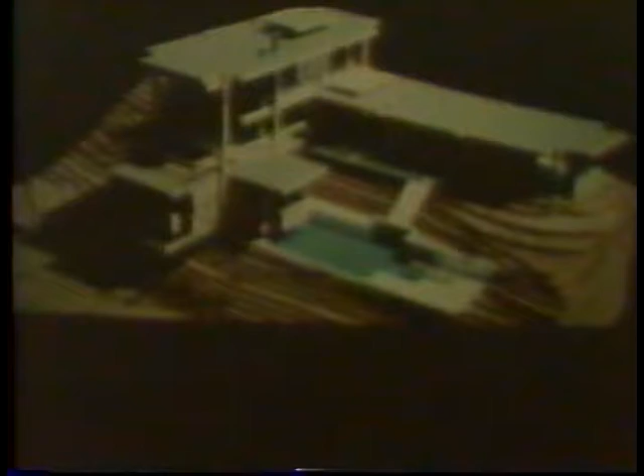And the use of obscure glass - we used a glass called Factrolite, and I used to like it a lot because the tree shadows were very nice against this particular glass, and they had a very wonderful quality about them.

And then I dropped back quite a few years and started up again with garden apartments. I did quite a few garden apartments through this period, and the process there was slightly different but somewhat similar to what I was doing in houses. I was trying to take very small units.

These were in the 500-600 square foot range, and very simply by adding one wall that would slide, as you see there, that would close off the kitchen and the bath to some degree, and a wardrobe that could move around in the space, one would have the opportunity to make a one-bedroom apartment or a smaller bedroom or a smaller living room, whichever one wanted. This gave, I thought, the opportunity for young couples to have a certain amount of flexibility in a very easy and simple way.

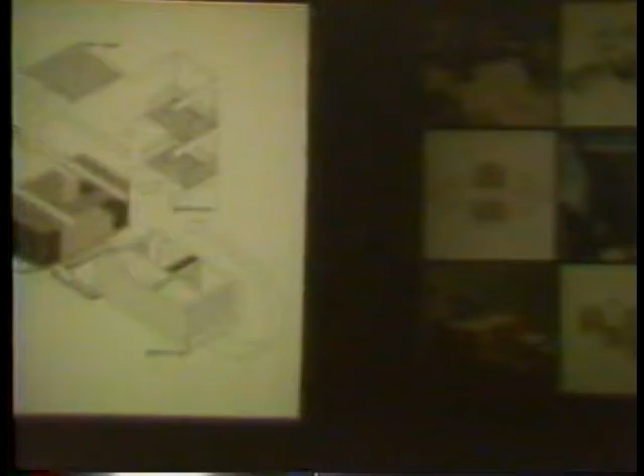But what I began to do was care about a system that I felt could be built on site or in the factory, and would be able to be controlled a little bit better, could be multiplied, and would have potential for use in low-income housing possibly.

I began to work with this idea of the core, taking the core, which could be craned into place, beamed between, and then living and bedroom units slipped in, independent of the other part of the structure, with pieces like the balcony unit then tacked on. It was supposed to work for this apartment next door, but that project didn't go ahead.

Later we had an opportunity, as you see on this slide up here, to do some student housing, and once again I tried to incorporate that idea of a series of these core units that could be placed together. The dark indicates the living, and the light, the bedroom units that could be tied in.

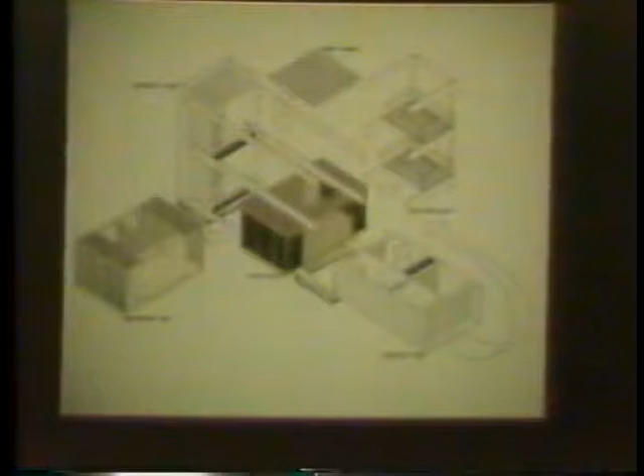And these were some potentials that could be developed to work out to be apartment units like you see there, student housing units. And then when that project didn't go ahead, we actually designed it in this modular fashion. We designed it also as a panel system, and we also designed it conventionally.

We did three sets of drawings for it in order to evaluate the bidding process, even though we worked with the contractor the whole way, and he felt we were in line with our modular system. We wanted to cover our bets, but the owner and developer decided to back out for other reasons. He was involved with political aspects, and he decided he didn't want to get involved with student housing.

But I then went on to use my private individual houses as an exploration for this idea. What you see here is a series of plan types that were used for exploration of this system, and you see four different variations here.

One very axial and simple. Another, my own house, which was a series of six units and living space here, the two bedroom spaces here. Another one that tended to stagger more. The service units varied somewhat because the early ones were 8 by 12 by varying heights, and in some cases I would use 4 by 12 by varying heights. I was using a plywood module and trying to work it that way.

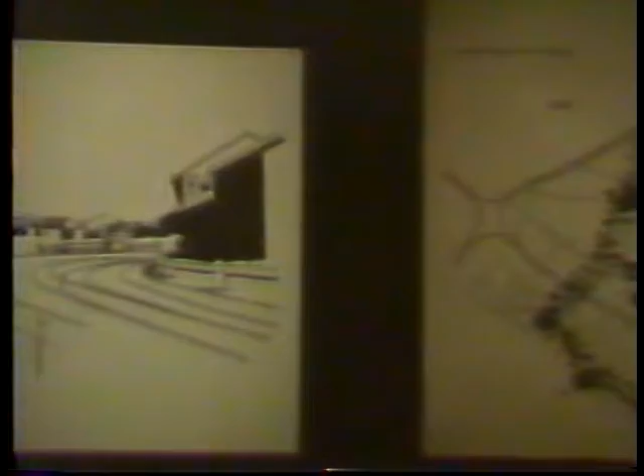So we proposed that we develop a walkway system for starters, that people could ride around in, look at the trains, experience the trains in place, come to the river, and just use it that way until it had the potential to be used in housing development or for higher intensity use.

We also proposed at that time—which I think is on this slide, oh wait, I'll come back to that afterwards—a damming of the river, which I'll show you, where we would use inflatable dams at the two ends of the river, and it could be used for recreation.

At the same time, it could be used for storing and using water, and there were all kinds of other uses. We took this to the city council. They were actually interested in the idea and went as far as talking to the Corps of Engineers, who said it was an impossibility—you can't use inflatable dams, you can't do this kind of thing, it would destroy the flood control. They had a million reasons why not.

But it was interesting—about 20 or 30 years after we did the river study, they came back and said that they now had an idea for inflatable dams. So you have to be patient when you're involved in positing ideas for planning in the city, because they usually take about 20 to 30 years to come back into place.

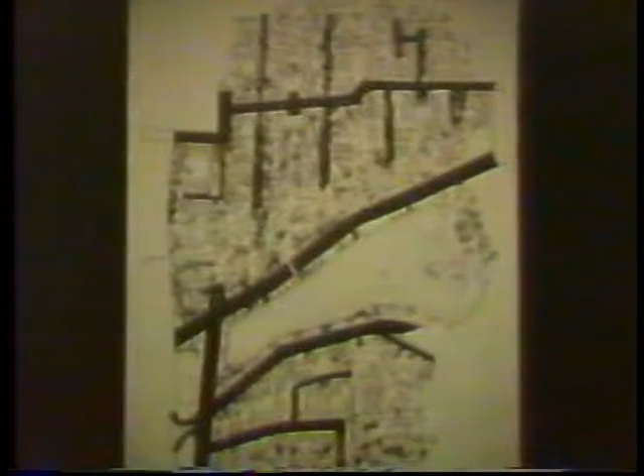This was part of the gray area study where we went into a neighborhood like Echo Park, and we looked at the housing stock as it existed and the streets as they existed. In this area you have alleys and streets, and so back to my old Greenbelt thinking, I'm from the Mumford age, we were going to take the alleys and all the guest parking, with people coming to the units off the alleyways. The streets would then be closed and used for play and for the kids and families. I don't know how this would fly today in gray areas where there's as much drug-related and crime-related activity going on. I think today ideas like this, I'm not sure of anymore, whether they would help the situation or worsen it. But at that time we found it just an interesting exercise for us.

This was the land use study. This is what developers obviously were doing to the hills in those days. As architects, I think one could look at that and say it's quite handsome, but at the same time, I think I'll opt for nature.

And we did at that time, and we looked at this from a standpoint of taking the same amount of development that they were proposing, and we came up with roadway systems, a whole litany of ideas on how you should develop roads in the hills. We tried to develop a neighborhood of single-family, multiple dwelling, high-rise that would give more development than padding it out for only individual housing, and leave all the rest of the land to nature. So we brought these ideas to the city and to the planning department to try to interest them in stopping this kind of rampant development.

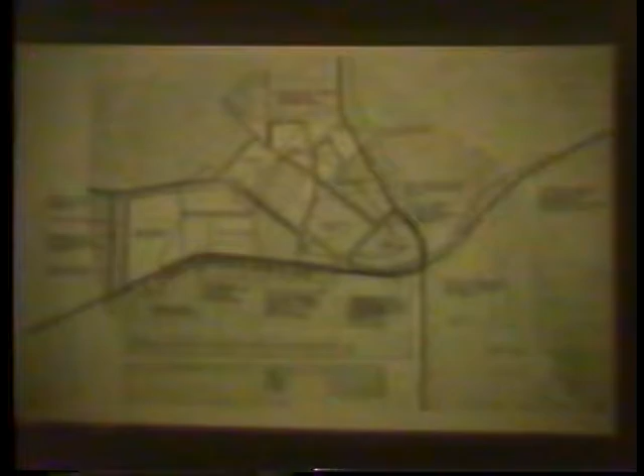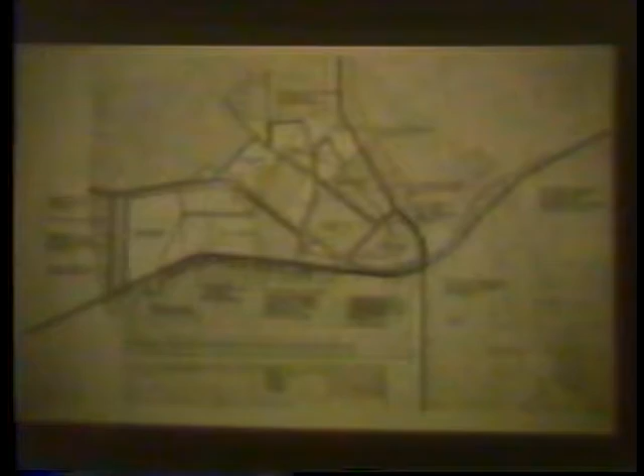We took this group and developed what we called a planning collaborative, made up of a whole group of landscape architects, psychologists, sociologists, planners, etc. We had Chris Alexander, who was going to be part of our process. We were up in San Francisco and down here. Our thinking was really to see if we couldn't be more competitive in the planning arena with some of the large firms and get work that way. This whole collaboration idea became interesting, the idea that individual designs and individual products weren't so important, but what was important was collaboration and development of interdisciplines and so forth. So our group started this, and we also had our little offices going at the same time in one location.

And we would work on jobs like these that we would get. Some would be housing. This one on the left is an industrial planning system. The one on the right was an open space and conservation project for San Clemente. We were doing overlay systems and pointing out sites that could be used for development and setting up sites that could be used primarily for conservation.

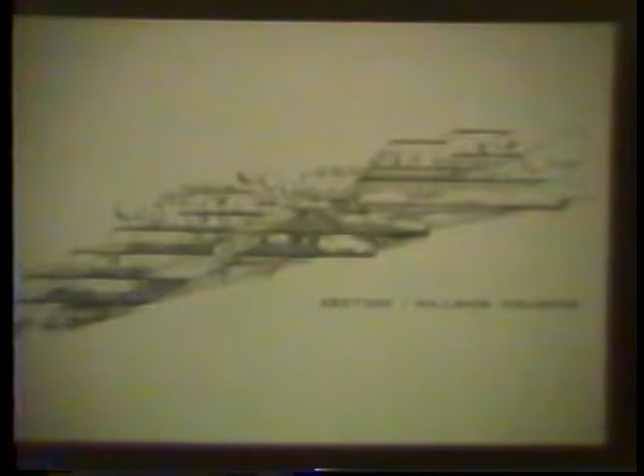We also had an opportunity to do our little new town, one out towards Valencia. It was a fairly hilly site, almost like an industrial town. The housing was in the hillside and also in the flatter areas, with the commercial area in the center. This little rail system ran through and over to a point which is really the industrial part of it. The system was again a downhill system that allowed cars to park underneath and the units to view out, etc. It had some European aspects to it, or hilltown aspects, in which local kinds of things like little markets, restaurants, and so forth would be in these little plaza areas up and through the units. So that was our opportunity to do that.

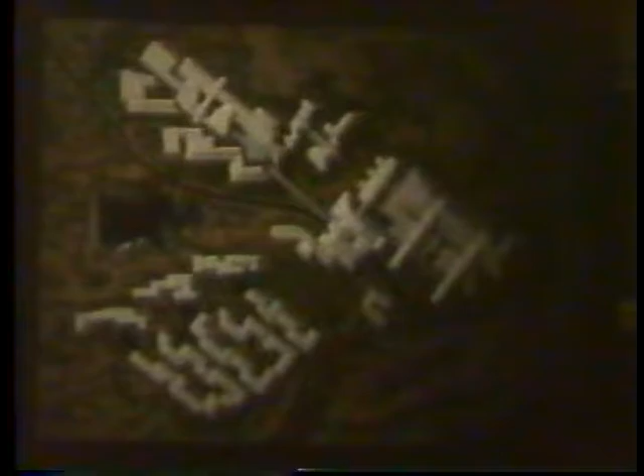At this point in time, I entered education. I got a call one day asking if I'd like to come out and chair the program at Pomona. I had done a little guest teaching at USC, and the opportunity to go to Pomona was appealing because it was a unique opportunity. They had a landscape program in place, an urban planning program in place, and architecture was just an embryonic option in the urban planning program.

They wanted to develop an environmental design school, and the idea of collaboration was truly appealing because I had come to the conclusion myself that I wanted to be involved that way—to be the third leg instead of the first. When I went to Berkeley, they also had an environmental design program, but architecture was the large leg, with landscape and planning quite minor by comparison. Here we had a chance to equalize.

So I took the challenge, which was interesting to me. At that time, for the first time in my architecture, I felt at one with my work. I felt comfortable with who I was and what my work was about, and I felt it was time to exchange ideas with students because I felt comfortable and centered enough—I wasn't threatened, nor did I have to be threatening.

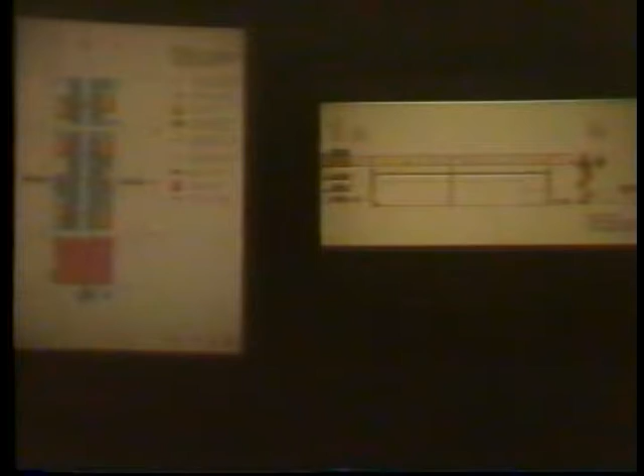We also did a study for the Santa Monica Mall when they were trying to do their linkages to the parking structures you see in yellow, and we proposed a series of linkages to a little people mover system, because the DOT was financing the study.

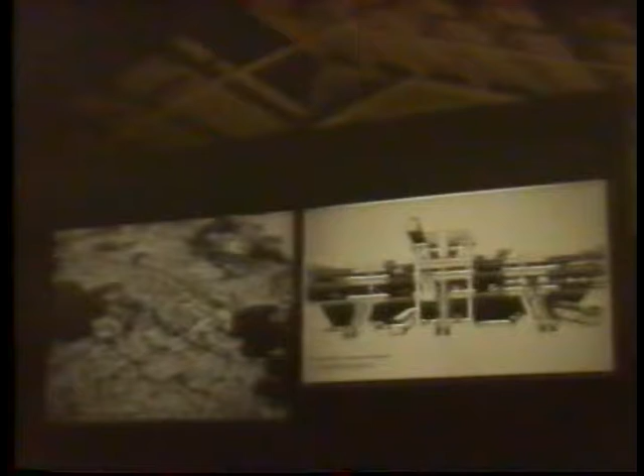Santa Monica Place — it was running back and forth here, and we were tying in from this point, and the Department of Transportation was going to finance it all. It was a study, and it went a little further into ways to get into the place. We also did other studies around traffic, and we were the prime urban designers and leaders of the people mover system for the city of Los Angeles.

Over the years I've been involved with transportation planning as well as a whole variety of other planning. But these were all projects that I guess were more — I'm not even sure they were our dreams. They were somebody else's. They were dreams.

At that point in time, you really look inside yourself, and we were about ready to quit the project altogether, but we continued on to see what the evaluation would be. It ended up that the bus system and the automated guide system were about equal, so we went ahead with this program, an automobile bus intercept.

We tried to enliven it with little amphitheater units that would have food and exhibits, so that our illustrious attorneys, judges, and criminals could come out into the middle of this mall and communicate with each other. We also wanted to develop an overpass between the plaza and the mall, continuing the connection back across and over to City Hall.

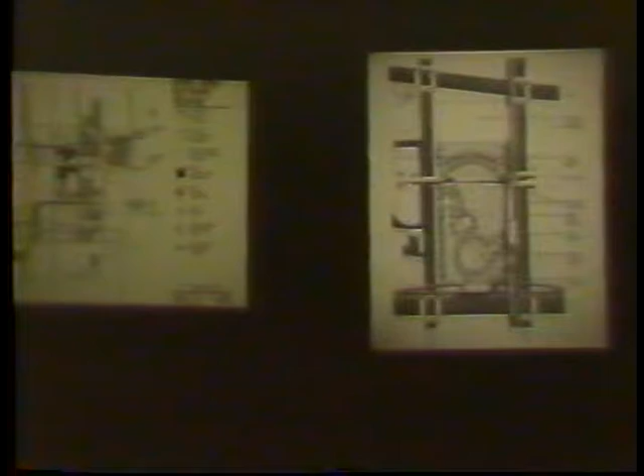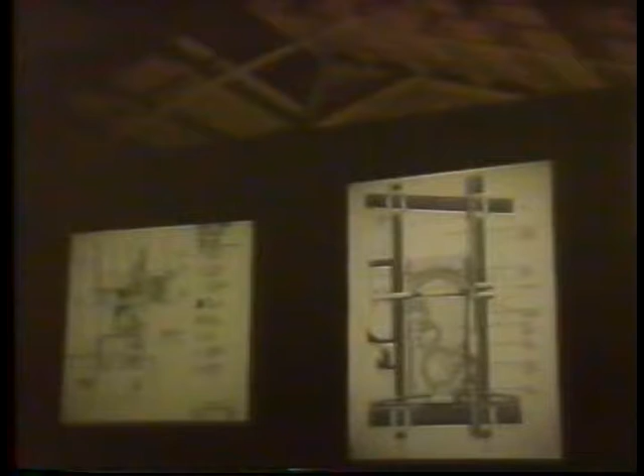We also did a study for the East Side in-town rehab, part of the station process. We were looking at buildings that could be reused as housing, what could be used for potential community buildings, where we might introduce additional commercial space, tree planting, and so on. We were always into those kinds of things. We went ahead and made landscape proposals for what would go around the stations near City Hall, and we were part of that process.

Another project was for Beverly Hills. This was a study for a corporation yard - a place where they bring all the vehicles that service the city to one location for maintenance. This was between Little Santa Monica and regular Santa Monica, in an area that was industrial but was proposed to go into residential. Our job was to make proposals to them on how to handle this corporation yard.

Our proposal was to take it underground several stories and raise a recreation field above it that could be used by the community as a whole, along with the housing that was going in, and introduce a community building. That was part of the whole proposal.

We also did industrial buildings. This is a water treatment plant where we were consultants, and the idea was to make the process of water treatment observable to the kids and people of the city, rather than hiding it behind walls. This was adjacent to a park and part of a process that we put forward.

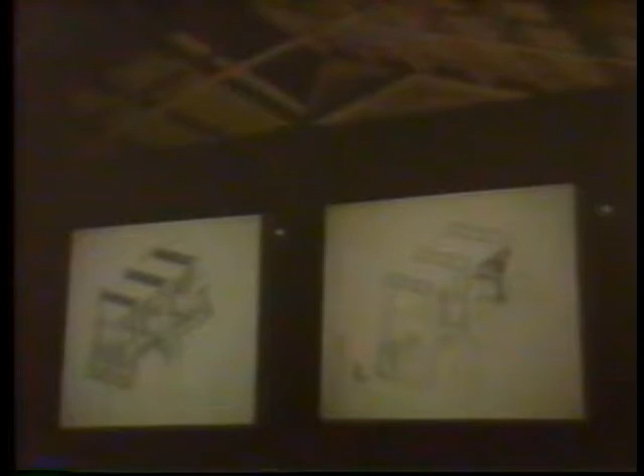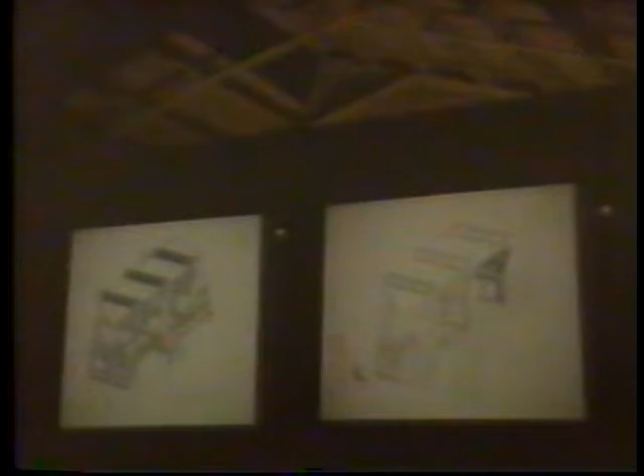So instead of getting the mass out of concrete and other heavy materials, I was getting it out of water.

This one was about using land mass. This was a rock hill that I had in place, and what we did here was develop that whole area as a greenhouse. During the day we would collect the heat, and this circulation element was then closed off during the day, and at night it would be open and the heat would come in, as you see by these arrows, into the house, and we get the advantage of that rock mass.

It also did another thing for me - you're probably all aware that on hillsides you usually have to stay 15 feet, or half the height of a hill, away from the base. By covering the hill like I was doing here, the city allowed me to go back and take my normal setback, and I could go right up against the hill. So there was a double advantage.

This was on a site that viewed the ocean, and not only was the rock hill used for storage, it was also used as the datum, and really was sort of the generator of the form in combination with the other.

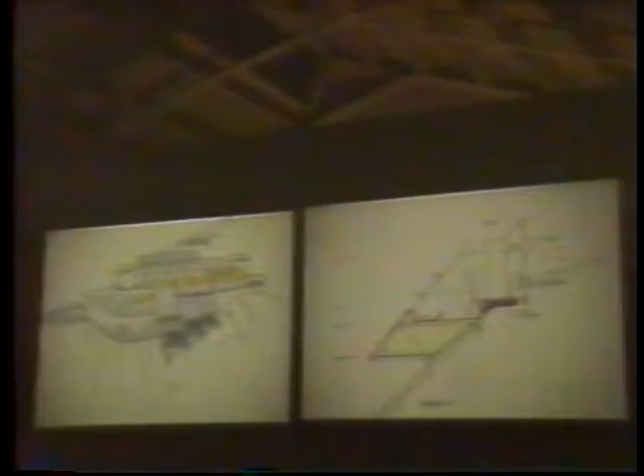And that was the plan—another one that was a linear design with a tank using the greenhouse, the solar collector, etc. This house at that time didn't go.

I had the opportunity to do a place in Denver, and on this site it was stepping up in a similar manner to the one I had designed before. So I used a similar mentality there to develop the solar collecting, the tower unit, which was the water collector, the viewing study, and the fireplace unit was part of this whole set.

And this one, I had a client who this time wouldn't buy wood. They wanted it to be a white house, so that was fine with me. So this was a plaster house. Totally, the intent was that...

The grounding piece, unlike most of the sites we get here in California, which were more constricted—I had a large site, and I wanted to define my landscape places, like I showed you here, with ground walls. They were to be made out of adobe, but adobe became more expensive than doing it out of block, so we did it out of block.

Those were made of the material and color of the ground, and the white was really the color of the snow in the wintertime. So this house has, different from what I have here, experiences of winter and summer, and has many fewer trees around it, so it's not the same experience that I had in Southern California.

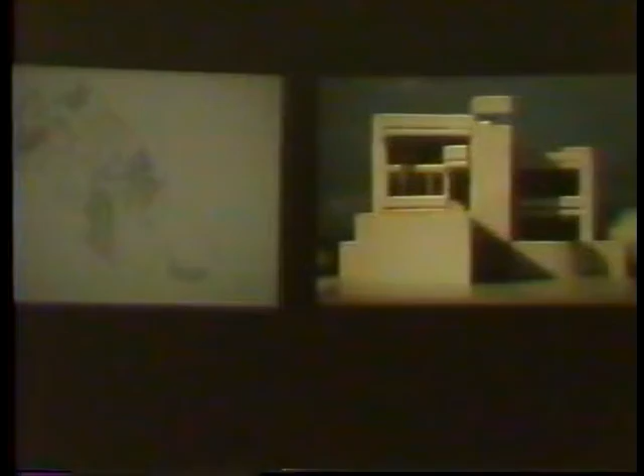The house was originally designed as all plaster, with no steel exposed like you see on the left. But I also thought I had enough shear wall in the vertical viewing element. At this point I designed it and went off to Europe, and the engineer came in and said I didn't have enough shear wall, so he added all these rigid frame fragments. The office didn't want to change the original diagram, so this frame started to take the place of these railings and other funny things he did.

It's a really strange rigid frame. Many of you know something about structure, you end up with a thing that's really decomposed in a sense, as it's supposed to express rigidity. This whole idea fascinated me when I arrived back in town. Just those four corners were up, and I asked the owner if I could strip the plaster off of those, because I liked those four pieces the engineer had designed, and I felt they should be expressed. So it wasn't a big constructivist act, it was really about finding something on the site that I didn't know was going to be there.

The 45-degree turn on this one relates to the fact that the sun and most of our grids are really 45 degrees to a north-south axis through a large part of our city, so quite often you have an automatic 45-degree grid turn. Of course one movement in a grid does put a place in motion, so this is a little strange vocabulary-wise for me, but it came out of thinking about energy, solar, and an internal garden in a city where I had to close the sides off. We planted avocado trees and citrus, which didn't make it over time, but it was another bunch of ideas I tried to play with.

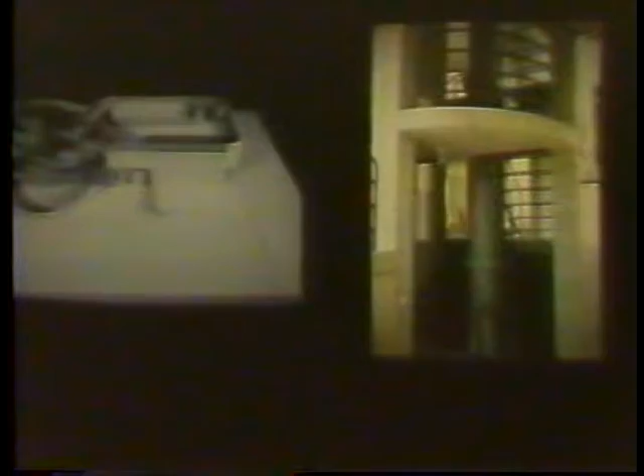This is the wall that takes the heat. All the other things we take for granted - the interplay of space, the glass stair that lets light come down through the center core, the entry that comes out of the bowels of this building and moves up through to the top. Well, the right doesn't go with the left, but anyway - then there's the duct that takes the heat down and the duct that takes the heat up, and that whole process of showing this kind of stuff.

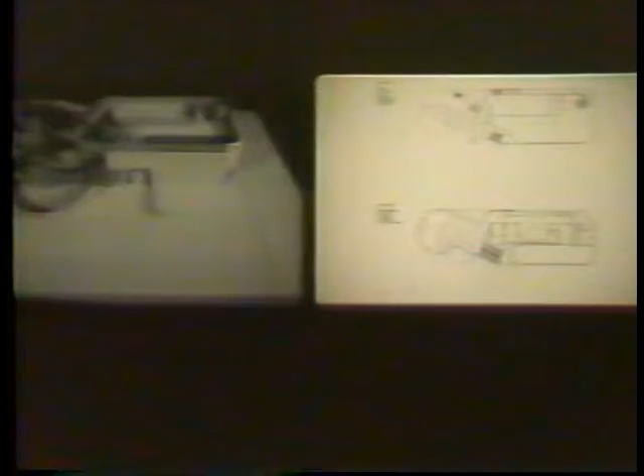This house is down in Manhattan Beach, and it also had to do with energy, motion, movement, kinetics, and a lot of other ideas. Once again, the grid shift here is for energy reasons - I go 15 degrees off to be south-facing. There was a solar collector in this middle unit here. We had a pool on the roof, and this sort of wave wall that takes in as much public space as we can, but basically it's your typical 30 by 90 beach site in which you fill 100% of it.

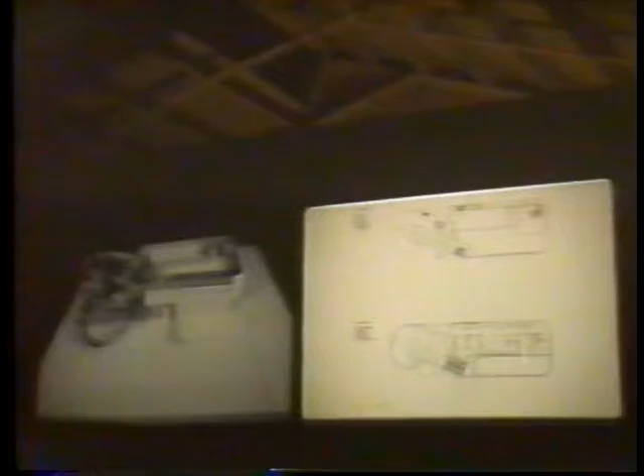You're looking at the plan of the roof, the plan of the upper level, and the model. The idea of the building was that the back portion - the garage, the service, the pool area - was all concrete and static.

The front end was supposed to be all metal and steel and have the potential for motion. The screening systems were supposed to move. The privacy systems were supposed to move. And so it was my way of trying to get motion and movement in the process.

What happened in the process, the owner wouldn't buy the metal skins, and I was forced back to wood again. So you can sometimes trap yourself in your life if you get off with certain ideas and materials. People keep moving back that way on you, and it's a little more difficult to move them in a direction that sometimes you would find better, because here I would find it to be a lot lighter and a lot simpler. But they liked the idea of teak when they went down to Salk Institute, and that's the way this developed.

This is the diagram of how it works, really energy-wise. The horizontal fins that you saw are really daylighting elements, and they were, again, modulated so from a seating point and a standing point. Lights brought in from the backside as well.

Solar collectors are, again, turned 45 degrees because of the typical grid. Air scooping was done to scoop the ocean air, put them in a plenum, and feed it into the building. We had west fins to cut down the sun coming in from the west side. We allowed the west sun to come in certain portions because the upper floor of this was used for nighttime use. So the building formally came out of all of those issues.

And then they wanted the parking structure screened in. Originally it was open, and then we attempted to make it a piece of planting that would gradually grow down this element and sort of echo the green planting of the freeway that moves up to the freeway element. The fins and the turns and a certain amount of the motion that takes place by that, the scoops.

Gymnasium for Loyola Marymount project that I wish would have gone ahead but never did. It was a cable structure, so structurally it was very interesting, in which it was supported and held down by the handball courts, the mass of the courts, and this air scooping system.

It had airplane hangar doors that opened up and made this total theater. The old gymnasium was here. The linkage was a collector that would work for the pool at the entrance point. And so it was about a bunch of things.

And it looked like so from the ground, and in context with the old it looked like this. And this again is the idea of really working counter to the old, which I think marries the old as well as trying to repeat the old. And I think respecting the proportions in our openings against those openings and counterplaying makes as good a marriage, if not better, than trying to marry it to an historic piece that does something else.

I always wondered why they didn't put one of these things together for rec vehicles, because they're always pulling another car behind, which seems such a waste. It seemed to me it was always better to break these things apart or attach them together to make a bigger thing. The things I was recommending to NASA at that time were studies in a variety of wall types that would be double-layered transparent materials in which we would put in gases and fluids to change that. So these were ideas and dreams.

This was one of my few campus buildings. I had much the same experience that John Lautner did. This was my proposal, which had tremendous 80 mile-an-hour winds. They wanted to solve that problem, so I created this sort of airfoil for that.

It was for the behavioral departments. I tried to develop a series of small courts around which each department would develop, and this was for students to come talk to faculty. I wanted it to be a place where you got out of that little stupid cubby hole you usually had to sit in at universities, and could be a little more lively.

I was also into other ideas of energy. They wanted me to talk about energy, so we had water systems that worked, a bunch of stuff. But I got knocked down by my campus head of construction, and the building ended up being a typical three-court building and fairly conventional. That's probably my first and last campus experience.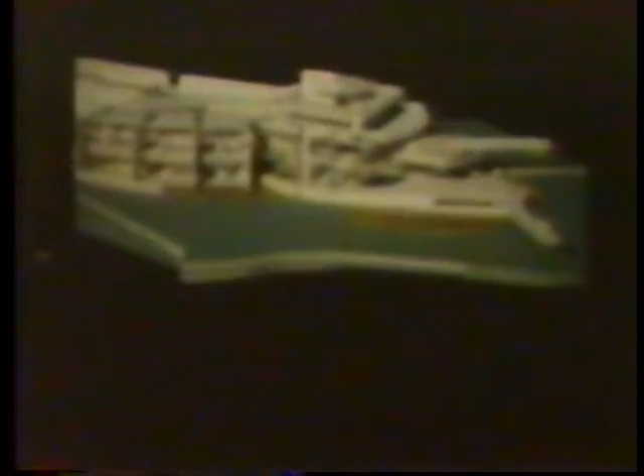My older son is doing one up outside of San Francisco that's a little bit more in the attitude of my 60s work. At the same time we're doing a development up there. I'm also very pro architects being involved in development. We're doing an 11 unit, trying to deal with lifestyles in a different manner. We're incorporating into this apartment unit a daycare center, potential home office use that can be used in common, and a bunch of social spaces that has sort of a co-housing mentality about it. We're doing it as an experiment in housing type.

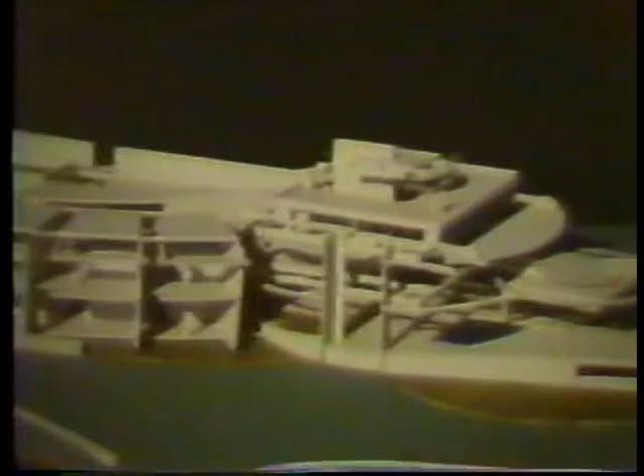Then there's this project, which I'll go through quickly, and this will be the end of the presentation. We have a fantastic site down at Palos Verdes, and this goes down to the ocean below. But between the coastal commission and the planning, they're holding us 50 feet back from the top of the slope, so we're unable to really design the building so you can see whitewater from any of the spots. So we have that added part to deal with.

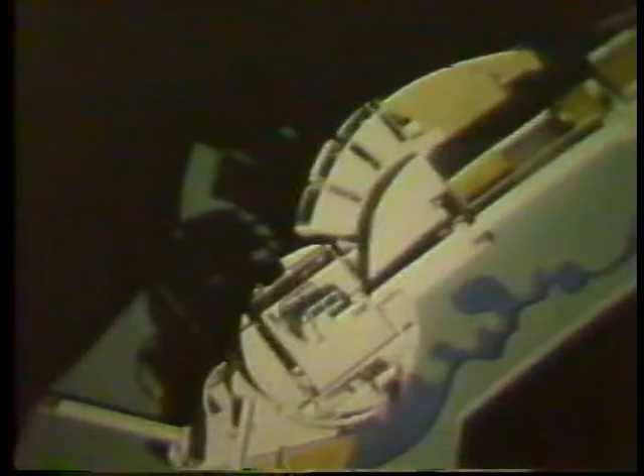We also have, from point of entry to point of where you begin to reach the key part of the site, a very long bridging or walking path, which is also interesting. So what we've done is come from the street, bridging through, taking our parking underneath, and the thinking was to enter the building from the top and go down through the middle. There was also the potential to stroll out of the building at ground level and go out a different way, or even come back this way. There's a wall that starts from the ground and comes through the whole site, cutting it in half, separating the more public side from the private side of the project.

The main part of this project now, I think, incorporates a lot of ideas we've used over time, only brought up to date in a better way. Going back to the whitewater idea, we were allowed to take a piece out to this point. So what we've done is bridge this piece out right to this point, but put it on a rotation, so we can take that rotation and get outside of our 50 feet by getting closer that way.

There was also the idea of developing a detractable or retractable unit that would sit at this point and then pull out, moving around the site this way. At the upper level of the bed, we had ideas of letting the bed move on out into the outer space, so it could also move in and out. So we're developing kinetics, which have always been near and dear to me. Hopefully we can get some of them into this project. Some of the energy things are there too.

This is the diagram of how it works, really energy-wise. The horizontal fins that you saw are really daylighting elements, and they were again modulated, so as a seating point and a standing point. Lights brought in from the backside as well. Solar collectors are again turned 45 degrees because of the typical grid.

Air scooping was done to scoop the ocean air, put them in a plenum and feed it into the building. We had west fins to cut down the sun coming in from the west side. We allowed the west sun to come in certain portions because the upper floor of this was used for nighttime use. So the building formally came out of all of those issues.

And then they wanted the parking structure screened in. Originally it was open, and then we attempted to make it a piece of planting that would gradually grow down this element and sort of echo the green planting of the freeway that moves up to the freeway element. The fins and the turns and a certain amount of the motion that takes place by that, the scoops.

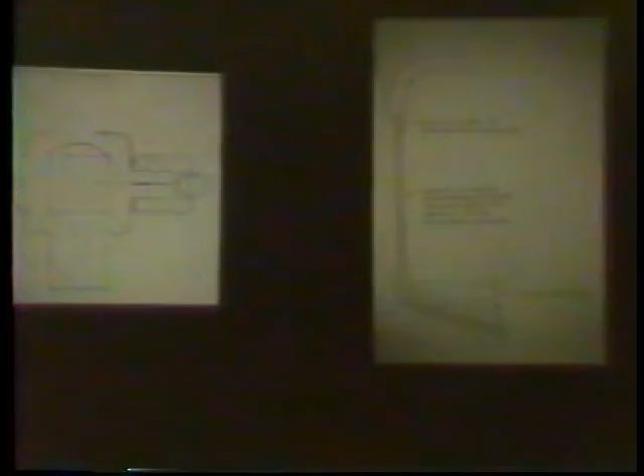I also had a chance to do an advanced technology house, and this was about another series of ideas which was meant to be mobile and changeable. This was the little vehicle unit that was electrically driven and similar to the one that I had proposed for freeway systems earlier. It was to draw a unit that had the bath and kitchen and potential sleeping in it.

So this was like a van. This would be like a miniature vehicle. This 14-foot diagram is not so dissimilar from my cubes before, but it was going to be out of plastic. Had the 4 opening ends. The idea was that these pieces could flip out in a variety of ways. The sides would drop down for decks. The top would pop up. The center could rotate and change. And so this was about a lot of kinetic ideas, as well as these other attachments.

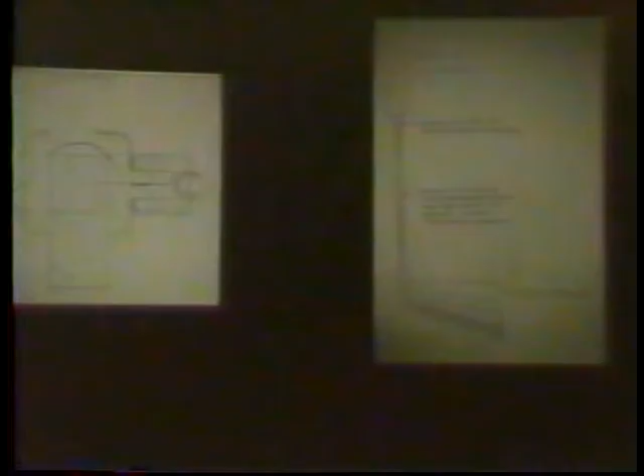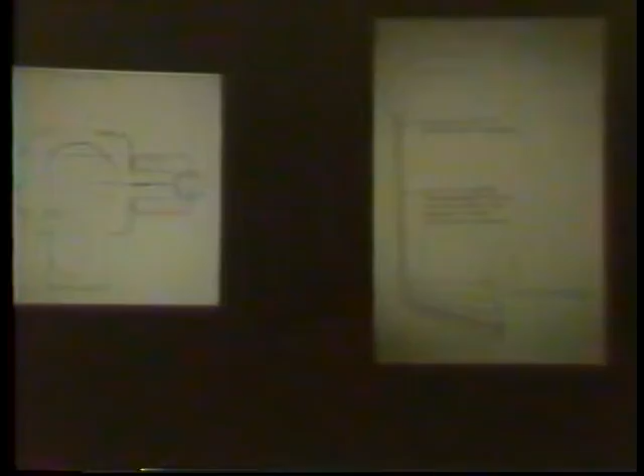It's interesting, they've just come out with a vehicle now that does this, where the car disengages. I always wondered why they didn't put one of these things together for recreational vehicles, because they're always pulling another car behind, which seems such a waste. It seemed to me it was always better to break these things apart or attach them together to make a bigger thing. And the wall was, the things I was recommending to NASA at that time, were studies in a variety of wall types that would be double layered transparent materials in which we would put in gases and fluids to change that.

So these were ideas and dreams. This was one of my few campus buildings.

I had much the same experience that John Lautner did. This was my proposal, which they had tremendous 80 mile an hour winds. They wanted to solve that problem, so I created this sort of airfoil for that. It was for the behavioral departments. I tried to develop a series of small courts around which each department would develop, and this was for students to come talk to faculty. I wanted it to be a place where you got out of that little stupid cubby hole that you usually had to sit in at universities, and could be a little more lively.

I was also knocked down by, it had other ideas of energy. They wanted me to talk about energy, so we had water systems that worked, a bunch of stuff. But I got knocked down by my campus head of construction, and the building ended up being a typical 3-court building, fairly conventional. That's probably my first and last campus experience.

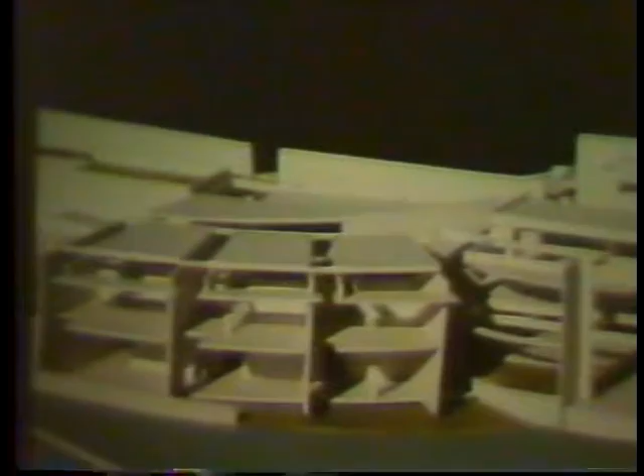And then there's this project, which I'll go through quickly with you, and this will be the end of the presentation. We have a fantastic site down at Palos Verdes, and this goes down to the ocean below. But between the coastal and the planning commissions, they're holding us 50 feet back from the top of the slope. So we're unable to really design the building so you can see whitewater from any of the spots. So we have that added part to deal with.

We also have, from point of entry to the point where you begin to reach the key part of the site, a very long bridging or walking path, which is also interesting. So what we've done is come from the street, bridging through, taking our parking underneath, with the thinking being to enter the building from the top and go down through the middle and then come down that way. There was also the potential to stroll out of the building at ground level and go out a different way, or even come back this way.

There's a wall that starts from the ground and comes through the whole site, cutting it in half, really separating the more public side from the private side of the project. This project, I think, incorporates a lot of ideas that we've used over time, only I think it brings it up to date in a better way.

First, to go back to the whitewater idea, we were allowed to take a piece out to this point. So what we've done is bridge this piece out right to this point, but we've put it on a rotation. So we can take that rotation and get outside of our 50-foot limit by getting closer that way. There was also the idea of developing a detractable or retractable unit that would sit at this point and then pull out, and it could move around the site this way.